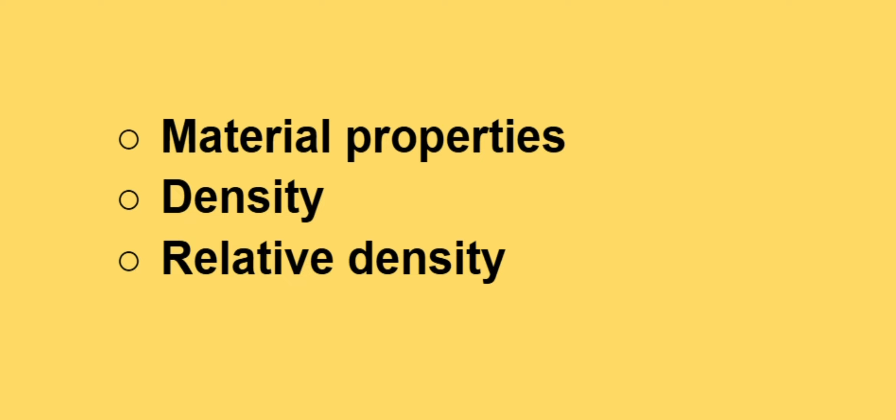In this video, we're going to talk about the properties of different materials. We're going to explain what exactly density is, and then we're going to cover the concept of relative density.

So, first of all, which of these is not a property of copper? A. High melting point. B. Strong. C. Ductile. Or D. Electrical insulator. The correct answer is D, right? Copper is not an electrical insulator. It is not a property of copper because copper is a conductor of electricity.

So that means conductivity is a property of copper, as is ductility. Ductile means you can bend it without it breaking - that's a property of copper. Strength is also a property of copper because it's reasonably strong. And another property of copper is that it has a high melting point.

Okay, so when you're working as a plumber, you're going to be working with lots of different materials, different metals. You've got copper pipe, aluminium sometimes, low carbon steel, several different types of plastics, all of which have their own specific properties. The reason why it's important to know about these properties is because that's what's going to determine whether you should use copper for a particular job or plastic for a particular job. It comes down to the actual properties.

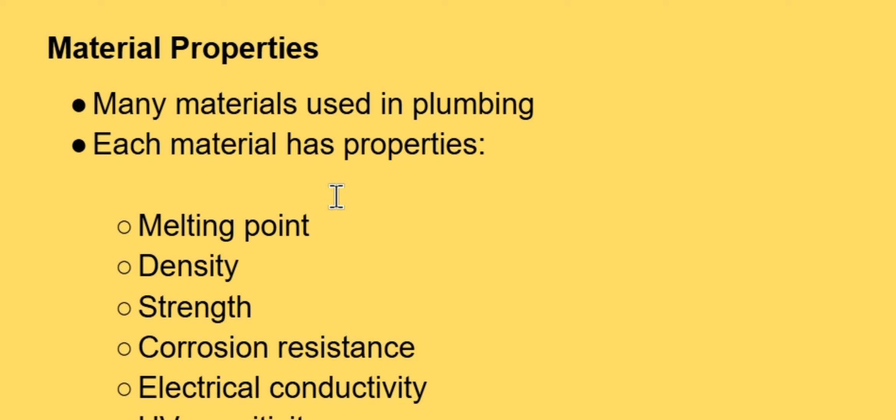Okay, so these are just some examples we discussed already. So melting point - if you think about a drain pipe that needs to carry very hot water, you need to know the melting point of the material you're working with, right? It's got to have a high melting point. Okay, then we've got density, strength, corrosion resistance.

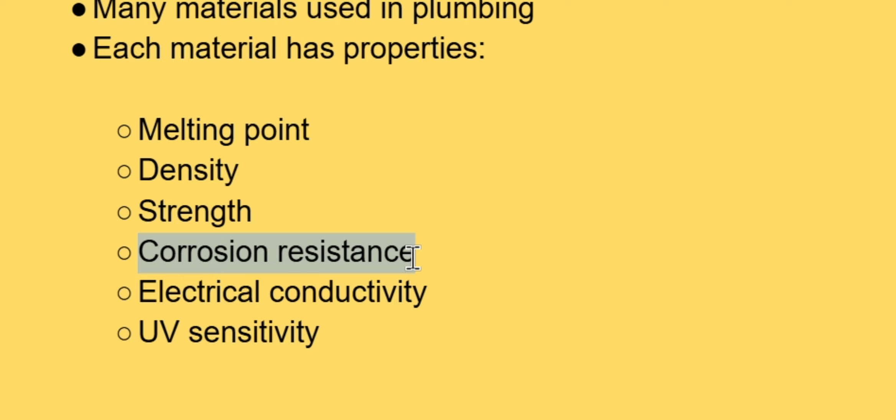Let's say you're installing in a factory that uses different chemicals. You need to make sure that the materials you use can resist the corrosion that comes from those chemicals. Conductivity is another one - if you're using a material that conducts electricity, that could be really dangerous. You're going to have to know that so that you can earth the pipes, or if you want to make sure that there's no risk of electrocution, then you'll use something that is an electrical insulator, and so on.

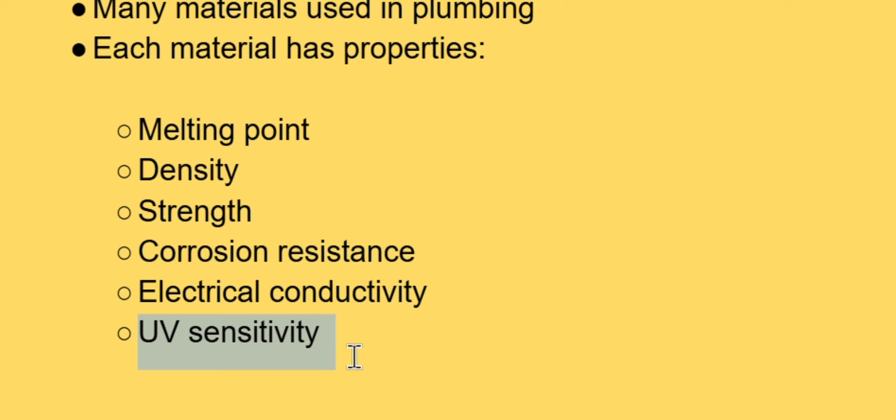UV sensitivity is another one - UV light is what comes from sunlight. So let's imagine you've got a material that is sensitive to UV light. The UV can break down certain plastics. In that case, you need to make sure that you're only using that in places where it's not exposed to the sun, because if you leave it outside in front of the sunlight, that material is going to get damaged and break down - it doesn't work. So yeah, that's basically why you need to know about properties of different materials.

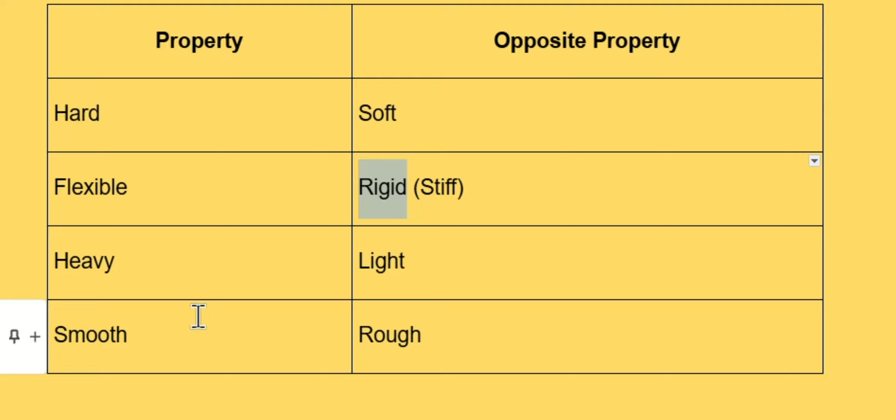Okay, so here we have some common ones that you've probably heard of in your day-to-day life. You've got hard, the opposite of which is soft. Some materials are flexible, so they're easy to work with, whereas others are rigid, which means stiff. Then you've got heavy versus light, smooth versus rough, conductive, the opposite of which is insulating. Then elastic, which means it can kind of bend and stretch, whereas brittle will break if you try to stretch it.

Okay, so that's not an exhaustive list of properties - we'll maybe come to that in another video. I just want you to understand the idea that every material has its own properties, and it's important to know about these properties because that determines whether you can use it for a specific job or not.

Okay, moving on. What is density? A. How shiny a material is. B. How easily a material bends. C. The mass of a material in a certain volume. Or D. How rough a material feels. So the correct answer is C, right?

So the two main factors that go into density are mass, right? Remember, we measure mass in kilograms, so it's similar to weight, but not exactly the same. Think of it as how heavy a material is given a specific volume - that's very important as well. So it's mass by volume. Actually, the correct formula for density is mass divided by volume, and that will tell you how dense a material is. When you think of the word dense, if something's dense in your day-to-day life, you'll think it's thick and usually heavy, and that's correct.

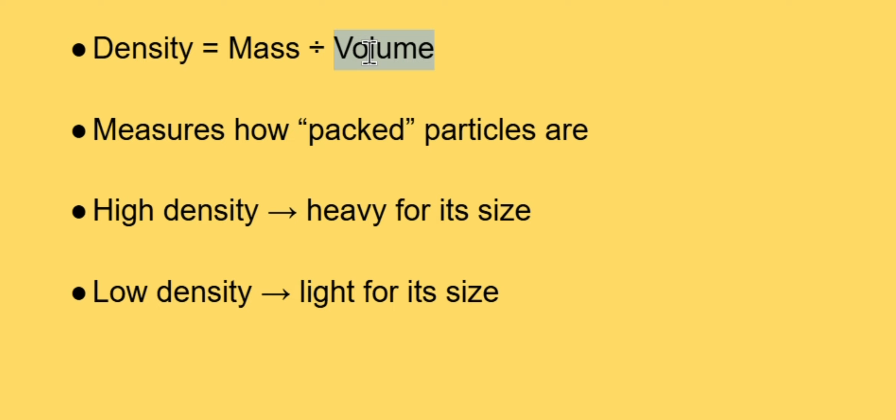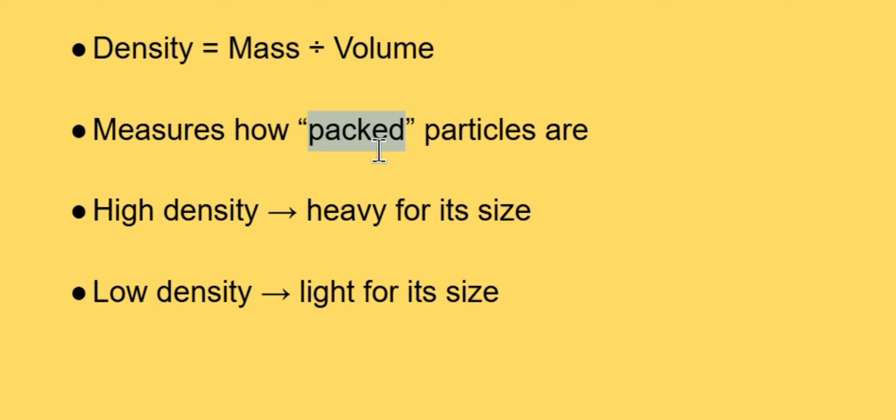However, if I ask you which pocket will be heavier, you're going to know that it's the pocket with coins in, because coins are made from metal, and the particles of metal are much more tightly packed. That's why the pocket full of coins will be heavier than the pocket full of tissues, despite them being the same volume.

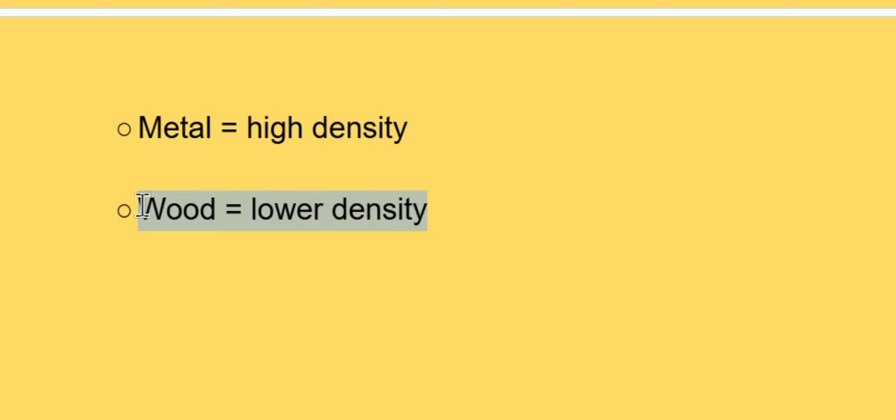Okay, so in general, metal is a higher density than woods tend to be, although even within woods and even within metals, you've got different types and different densities. But generally speaking, if you throw a piece of metal into a pond, it will sink, whereas some woods might float.

So if you hold them in each hand, although they're both the same volume, the one on the right will be much heavier because metal is more dense. So that's the idea of density, right? It's mass by volume. Okay, now we've come on to the idea of relative density.

So what is relative density also called? A, absolute weight, B, specific gravity, C, melting point, or D, mass ratio. The correct answer is specific gravity. So in plumbing and in science in general, relative density is otherwise expressed as specific gravity. Every material has its own specific gravity, and you can look up tables that will give you a specific number for every material.

Okay, so what does this word relative mean? Whenever you talk about something being relatively good or relatively bad, that means you're comparing it to something else. So when we talk about the relative density of any material, we're comparing its density to the density of another substance, a standard substance.

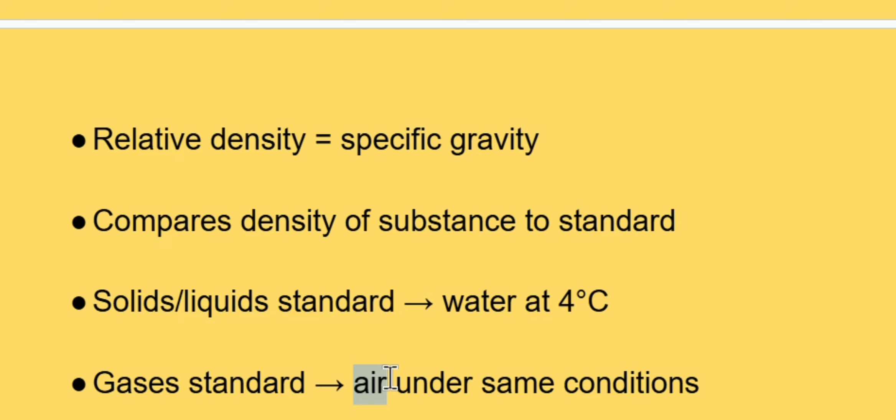And the same with gases. If you want to know the relative density of a gas, you're comparing it to air, just normal air that we breathe, because air is the most common gas on the planet. So it's water and air. Comparing the density of any other material to either of these two gives you the relative density.

So, question, what is the relative density of water and air? A, both are 2, B, both are 0, C, both are 1, or D, both are 10. The correct answer is C. The relative density of water is 1 and air is 1, because remember these are the benchmarks.

So if the relative density of a solid is more than 1, that means it's heavier than water. Right, it was more dense than water, given the same volume, okay? And if it's less than 1, that means it's less dense than water. And the same with gases, right? If a gas has a relative density of more than 1, that means it's more dense than air, given that they were the same volume.

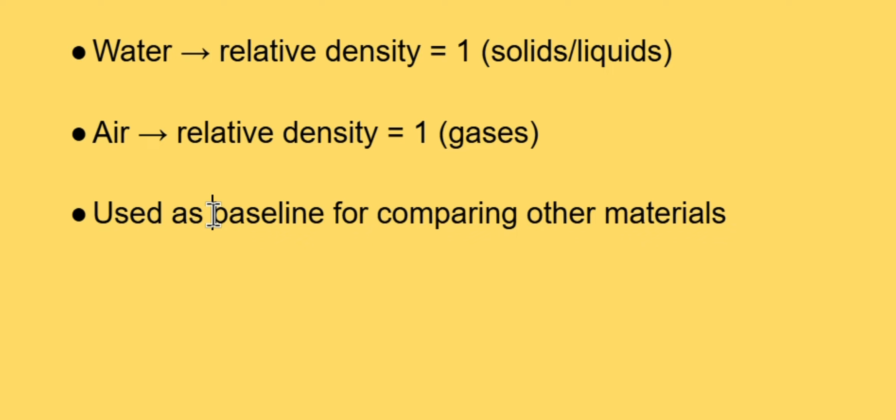So, here we go. So water is the standard for measuring the relative density of solids and liquids. That's why it's at 1, right? And the same thing with air. Any gas you're going to compare it against air, which is the benchmark. That's why that's 1, right? So it says use as the baseline for comparing other materials.

So, question, which gas is lighter than air? A, butane, B, propane, C, natural gas, or D, none of these? The correct answer is C. Okay, butane and propane, which are used a lot in plumbing. When you come to do your soldering, you're going to be using one of them.

They are both heavier than air, which means their relative density or their specific gravity will be greater than 1, right? Whereas natural gas, because it's lighter than air, that means its relative density should be less than 1. It's going to be 0 point something. So here we have it here. So this is a table with some of the most common gases.

The first thing to note is that we've got air in the middle, right? And the specific gravity is 1. Why? Because air is the reference for gases. It's the benchmark. You compare everything against it. So in the previous question, we said natural gas is less dense than air, which means its specific gravity is less than 1, which means it'll be lighter, whereas butane and propane are both heavier than air, which is why they have specific gravities greater than 1.

Okay, and it's a good idea to memorize the specific gravities for these two, because that often comes up in the exam. Or you might get a question asking you which is the heaviest, right? Remember, butane is the heaviest one that we use. If you just think of B for base or basement, which is at the bottom, things that are heavy go to the bottom, right?

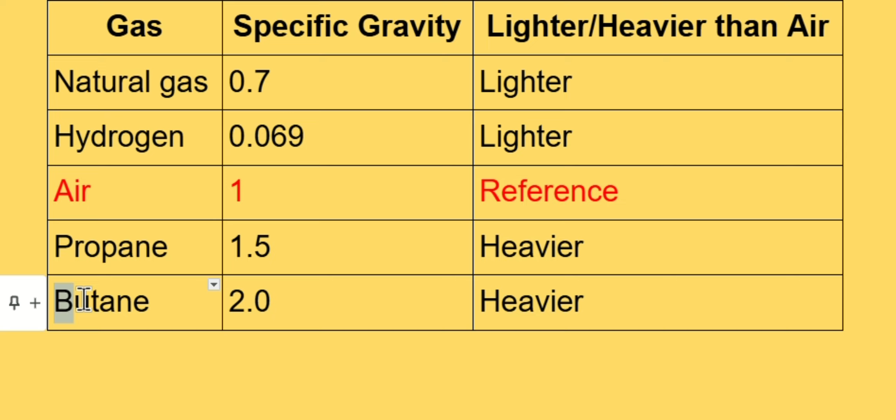Okay, which solid has the highest relative density? Right, so these are solids now, and remember, solids and liquids, both of them, we measure them against water to get the specific gravity or the relative density. So A, we've got UPVC, which is the plastic, B is brass, C, copper, or D, lead. Right, the correct answer is going to be lead.

Right, so remember, relative density isn't exactly the same thing as heaviness, but the heavier something is, the denser it is. So you know lead is a very heavy metal, which means it's going to have the highest relative density. Okay, relative density of solids. So again, just like for gases, we used air as the reference. For solids and liquids, we use water as the reference. So water is always going to be 1.

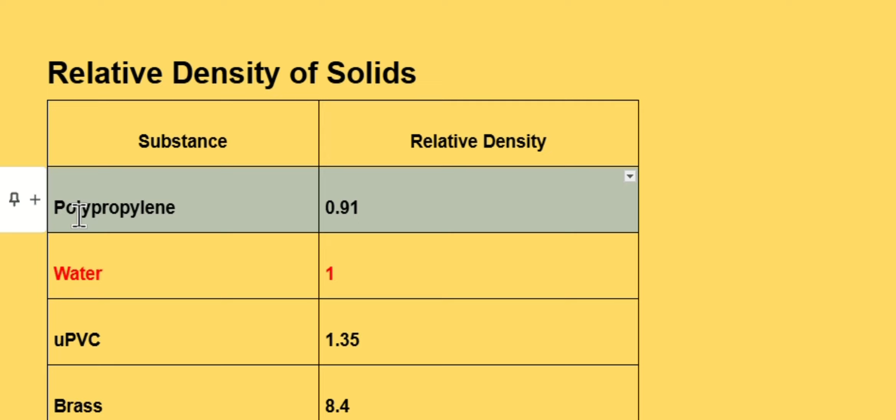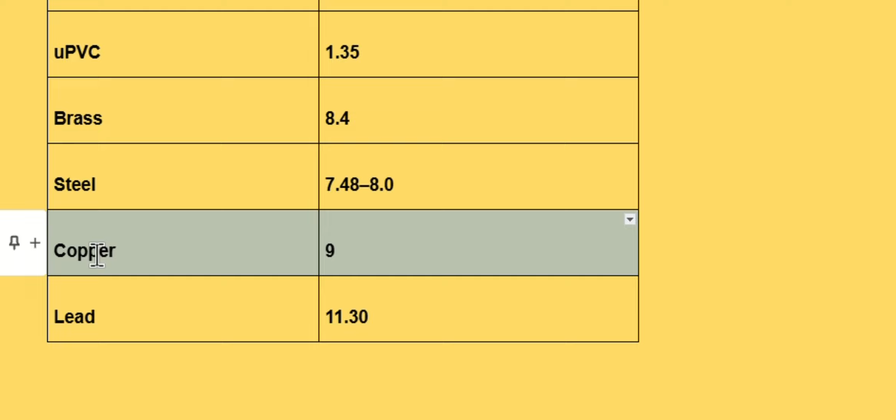Anything less than 1 means it's less dense than water. So if you throw polypropylene into a pond, it will float because it's less dense. Whereas the others, including UPVC, which is a plastic, are actually more dense, right? So it's a good idea to remember the relative densities of the most common ones we use. So copper is definitely common. That's 9 times more dense than water.

Okay, so to recap on this video, we have material properties determine the suitability, right? So depending on what the job is, you're going to have to know what properties a material needs to get the job done, and that will decide whether you use, for example, copper or plastic pipes. Then we've got the idea of relative density, first of all density, which is mass by volume, right? The volume bit is very important.

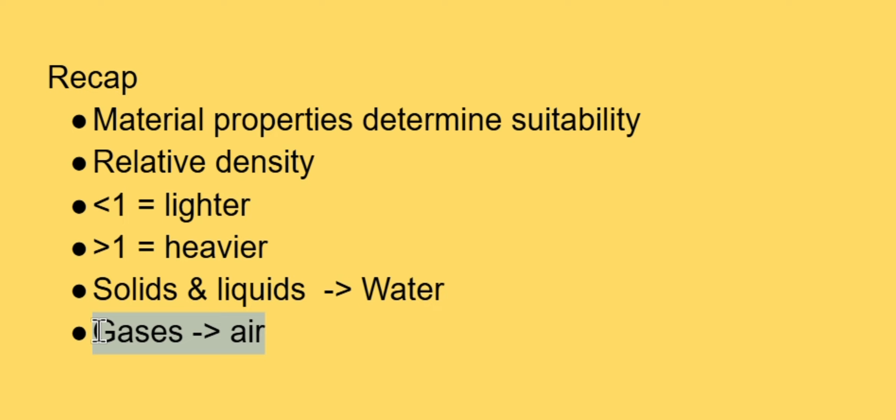Relative density is comparing the density of a material to a benchmark material, which is either going to be water for solids and liquids or air for gases. And if a material has a specific gravity of less than 1, that means it's lighter or it's less dense than either water or air. And if it's heavier, it's going to have a specific gravity of more than 1.